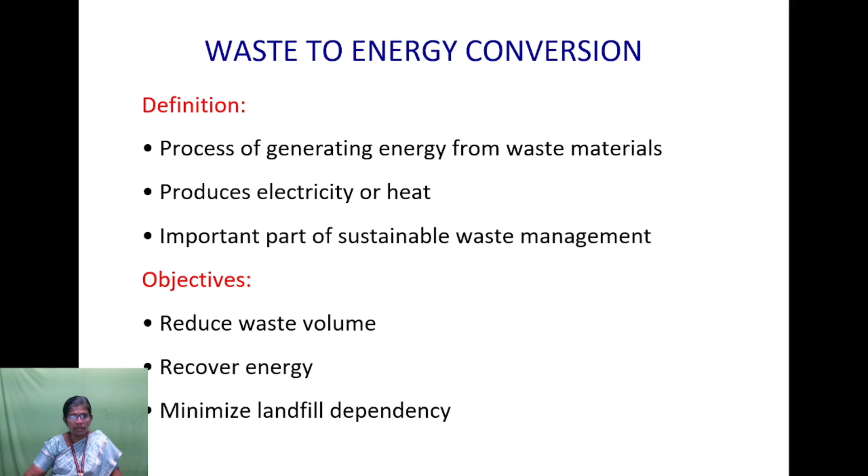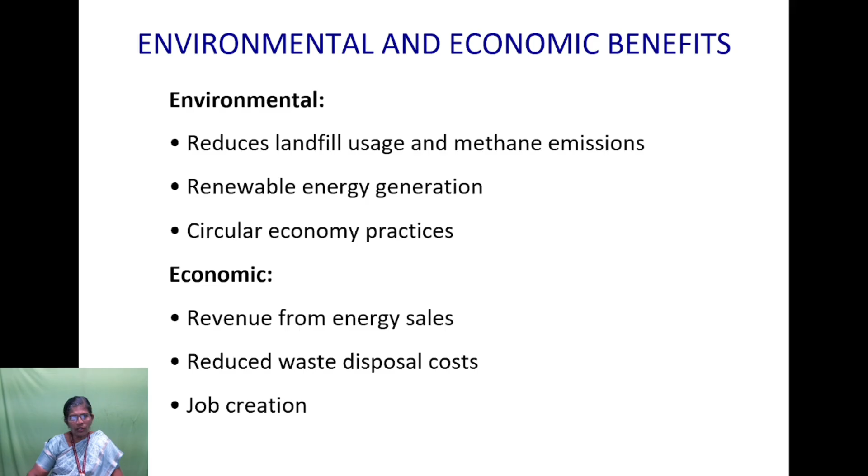Challenges in waste to energy conversion include technical challenges like high initial investment and need for waste segregation, and environmental challenges like emissions of dioxins and furans and toxic ash disposal. There are also social and policy challenges, including public resistance and lack of regulatory frameworks.

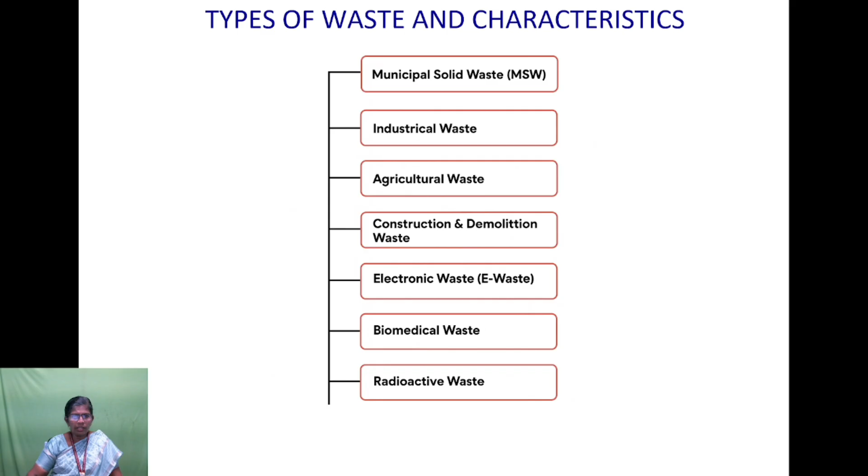Types of waste include municipal solid waste, industrial waste, agricultural waste, construction and demolition waste, electronic waste, biomedical waste, and radioactive waste. We will see these one by one.

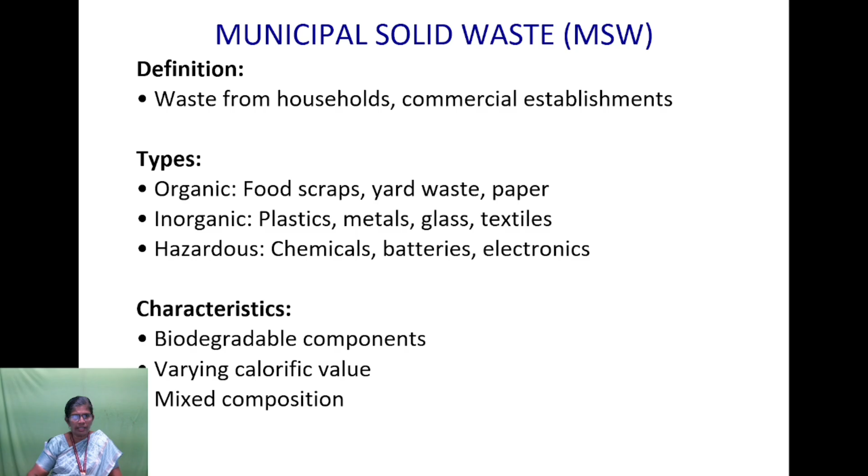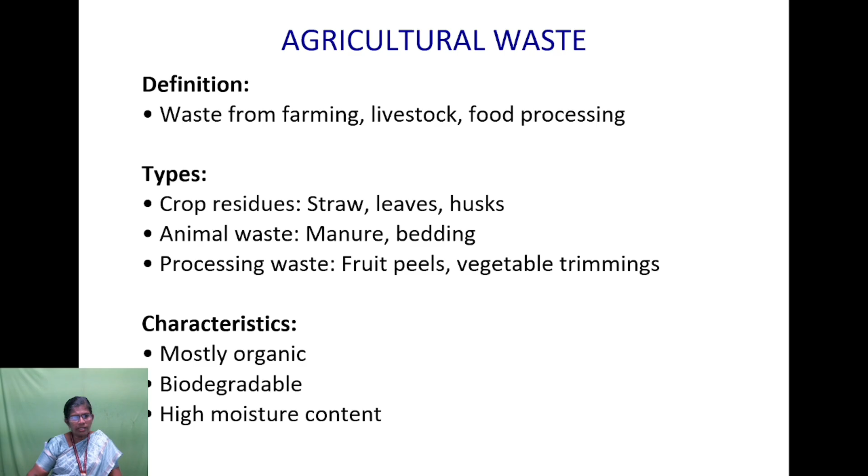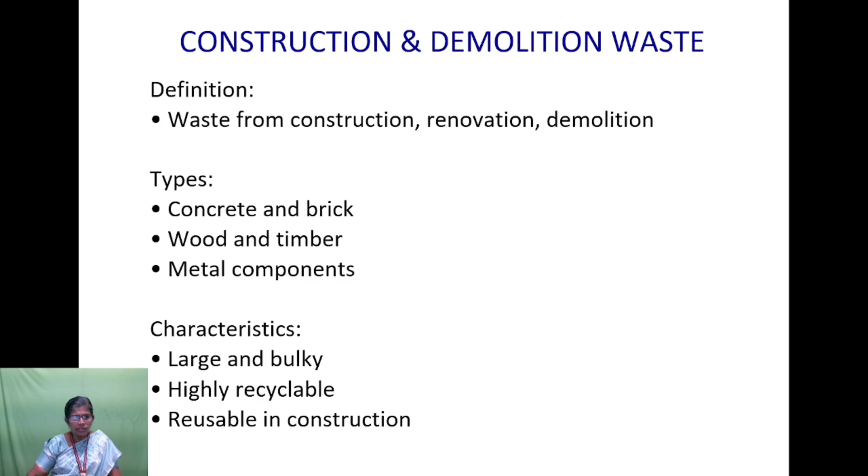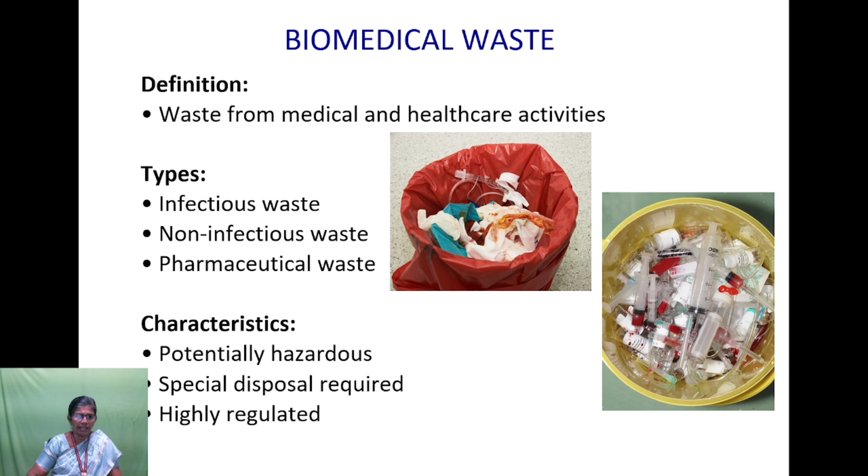Biomedical waste is from medical and healthcare activities. The types include infectious waste, non-infectious waste and pharmaceutical waste. The characteristics include that it is potentially hazardous and contaminative, needs special disposal methods, and has many regulations for disposal.

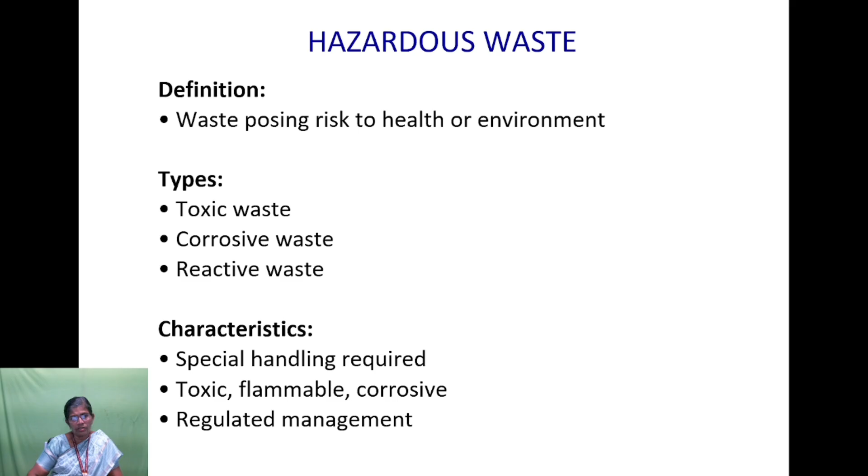Hazardous waste poses risk to health and environment. The types include toxic waste, corrosive waste, and reactive waste. It requires special handling, is toxic and flammable, and has regulations for its disposal.

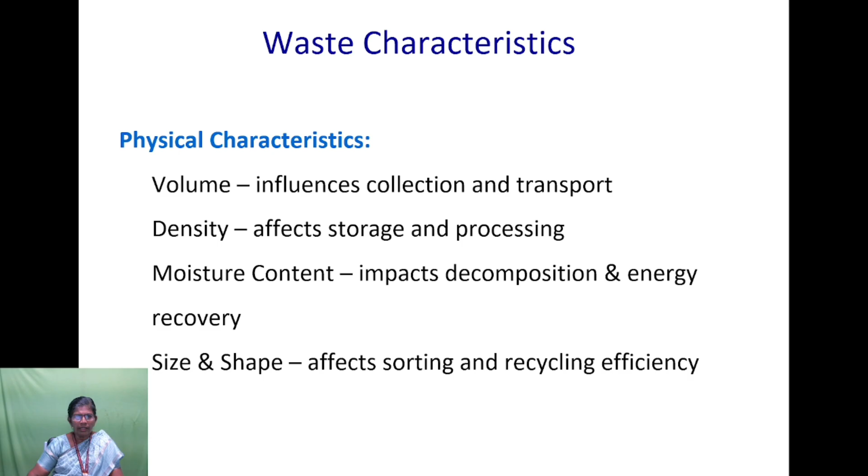Characteristics of waste include physical, chemical, and other properties. Physical characteristics include volume, density, moisture content, size and shape, which affect various processes, storage, and energy recovery and disposal.

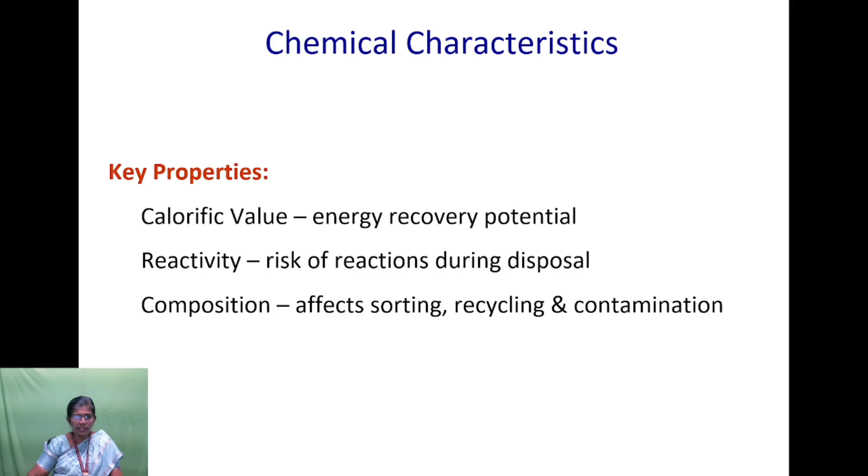Chemical characteristics include calorific value, which represents the energy recovery potential of the waste through thermal processes, reactivity which indicates risk of reactions during disposal, and composition, which may differ and affects sorting, recycling and contamination.

Biological characteristics include biodegradability and toxicity. Degradability includes biodegradable or non-biodegradable waste; organic wastes are biodegradable while plastics and metals are non-biodegradable. Toxicity is a critical concern because hazardous substances cause environmental and health risks. Common toxic materials include heavy metals like those in batteries and electronics, asbestos in construction debris, and hazardous chemicals in paints, solvents, cleaners, etc.

Environmental benefits of waste to energy conversion: it reduces landfill usage, reduces greenhouse gas emissions, and gives renewable energy. We can depend less on fossil fuels, and it gives resource recovery through sorting and segregation, leading to a circular economy and reducing environmental pollution.

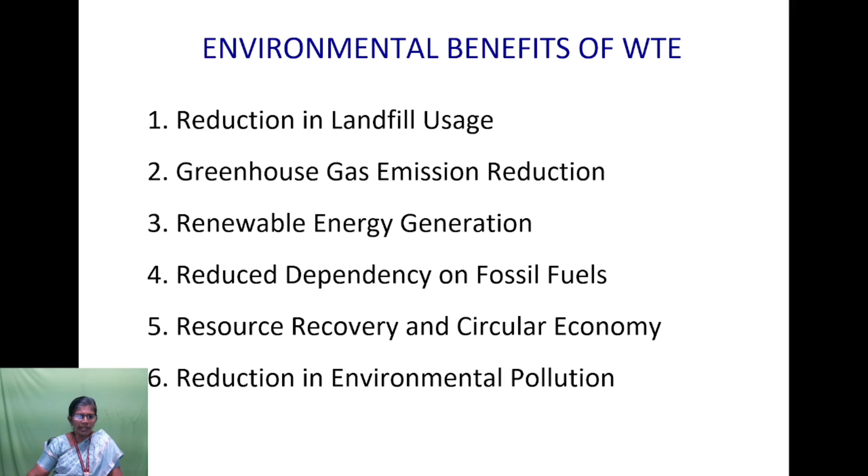Some environmental drawbacks of waste to energy conversion are air pollution and other emissions, and toxic ash as residue and byproduct. There is energy inefficiency, as it requires much energy, and water consumption is high. Health risk is also carried out through emissions.

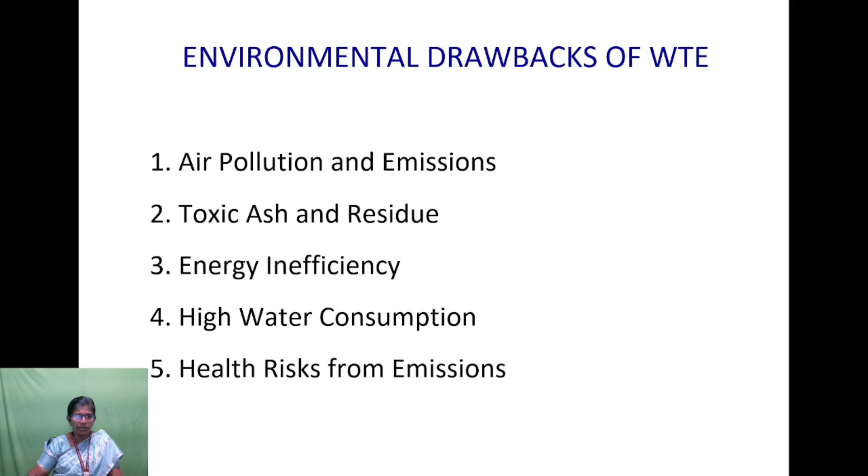Economic benefits of waste to energy: it gives revenue from energy generation and reduces landfill costs. It creates jobs and cost savings from energy recovery, and leads us to be independent from energy imports.

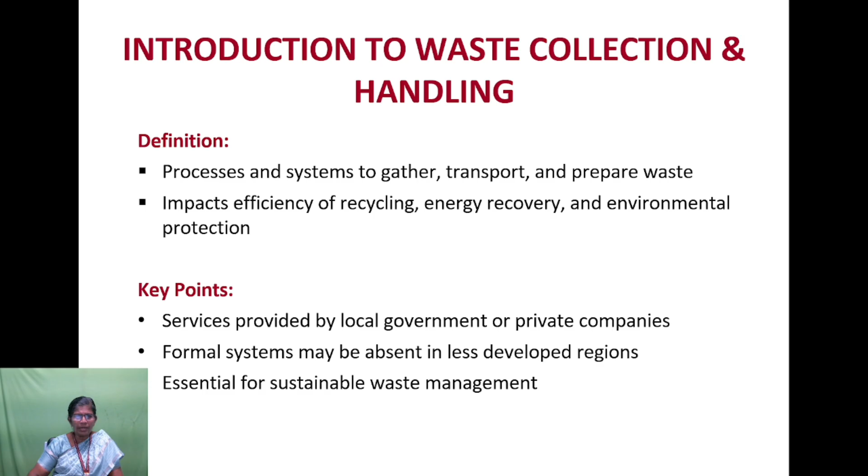The waste collection and handling - introduction. It is a process and system to gather, transport and prepare waste for further processes, and it impacts the efficiency of recycling, energy recovery and environmental protection. Key points include it being done as services by local government and/or private companies. Formal systems may be absent in less developed regions, but it is essential for sustainable waste management.

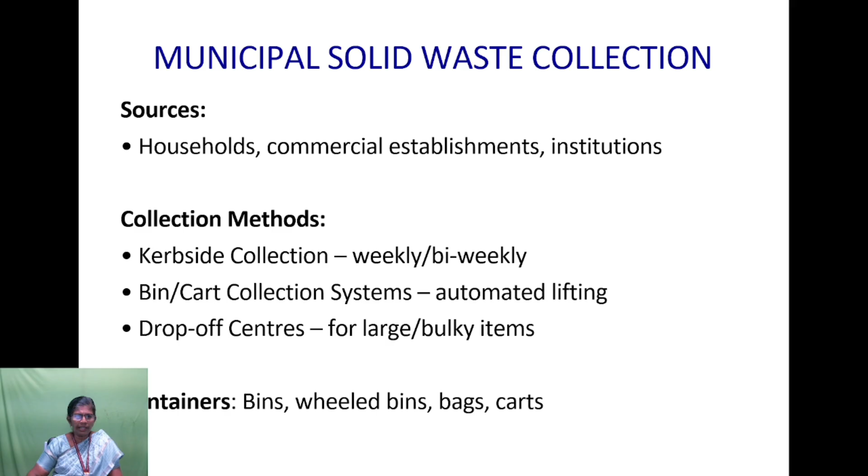Industrial waste collection: sources are from manufacturing and production processes from industries. Collection methods include on-site collection through drum skips, roll-off containers, and waste segregation, as well as bulk collection in compactor trucks or roll-off bins. Features include separate handling, and source segregation is very important.

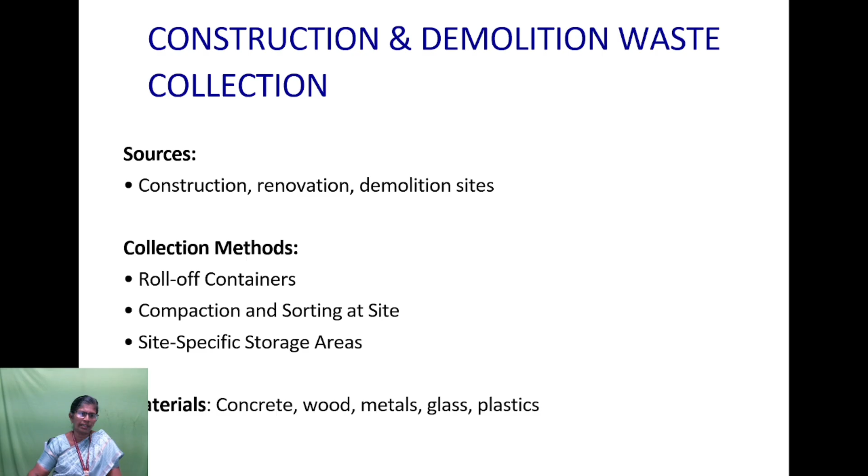Demolition waste. Hazardous waste collection: hazardous waste includes chemicals, solvents, batteries, medical waste, etc. Collection methods include specialized leak-proof containers and drums, with scheduled collection based on volume and type, which determines the frequency of collection.

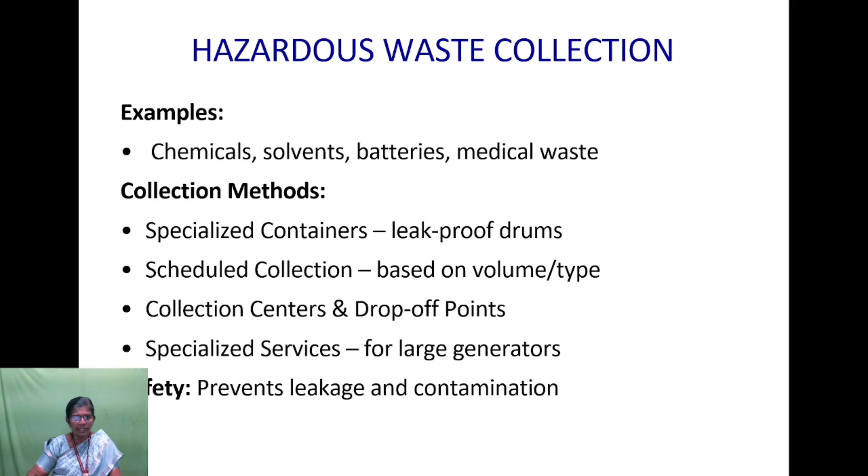Organic waste collection: organic wastes are produced in the form of food scraps, garden trimmings and agricultural waste. Collection methods include source-separated collection in dedicated bins, green waste bins for composting and digestion, and commercial organic collection from restaurants and stores. The uses are composting and anaerobic digestion.

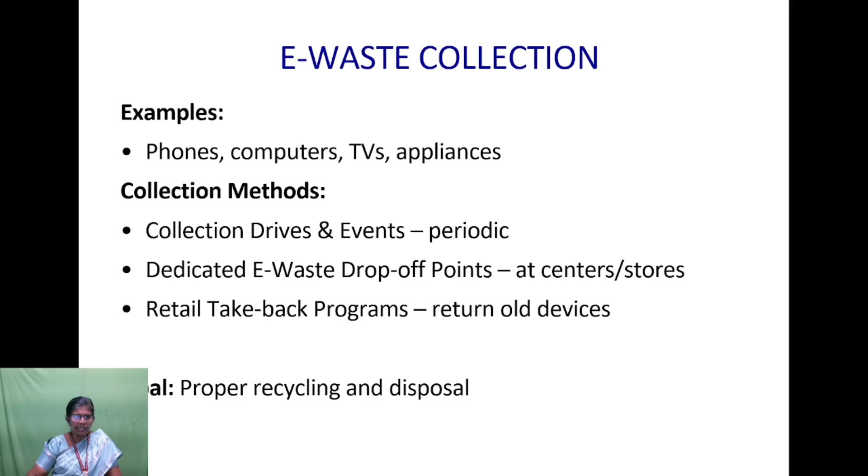E-waste collection: e-waste like phones and computers. Collection methods include periodic collection drives and events, drop-off points for e-waste at centers, and retail take-back programs where we can return old devices. This is a method of e-waste collection, and the goal is proper recycling and disposal.

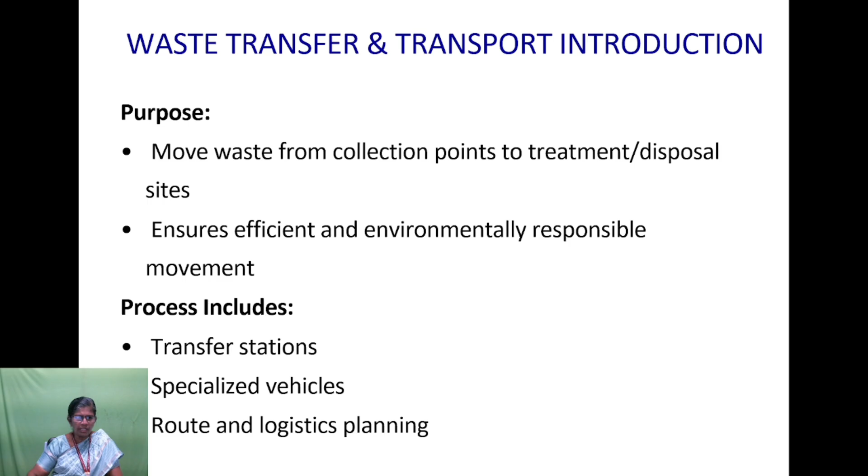Waste transfer and transport - introduction. The waste collected from various points should be transported to a treatment plant or disposal site. This ensures efficient and environmentally responsible movement. The process includes transfer stations, specialized vehicles, and route and logistics planning.

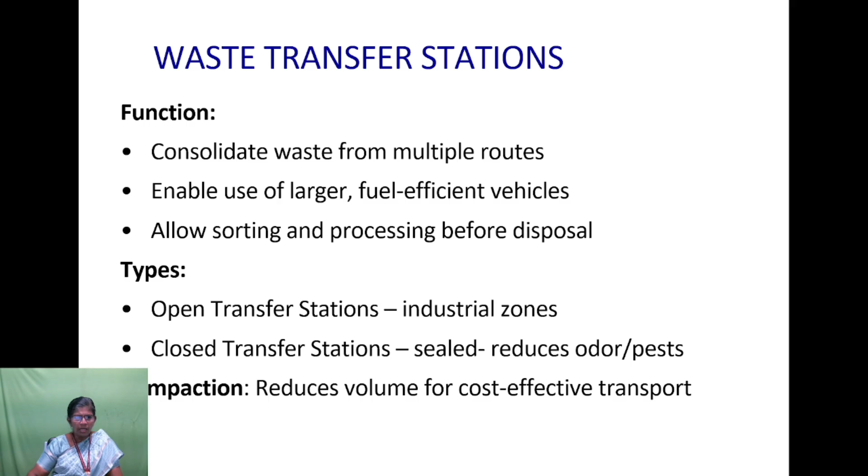Types of transfer stations are open and closed transfer stations. Compaction may reduce volume for cost-effective transport. Waste transport vehicles include garbage trucks, roll-off trucks, compaction trucks to reduce volume, tankers and specialized vehicles for hazardous liquid waste, and bulk transport vehicles for large quantities. Selection is based on waste type, volume and distance to be traveled.

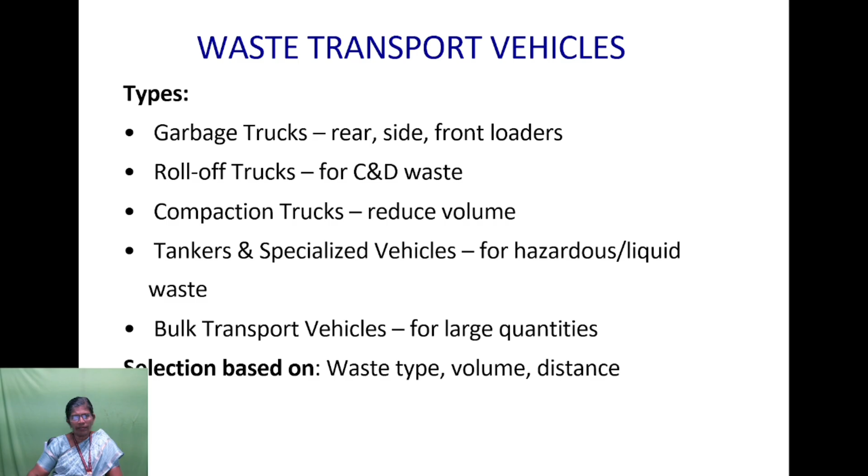Optimizing waste transfer and transport: strategies include route optimization and scheduling using software, technologies like GPS and automated systems, and sustainable transport through electric vehicles and alternative fuels. Collaborative approaches include public-private partnerships and municipal-industrial integration.

The benefits include lower cost, reduced emissions and improved efficiency. Environmental considerations in transport include air pollution, greenhouse gas emissions, noise and odor. Mitigation measures are low emission vehicles, proper sealing of vehicles, and optimized routes and loads. The goal is to minimize the environmental footprint of carbon.

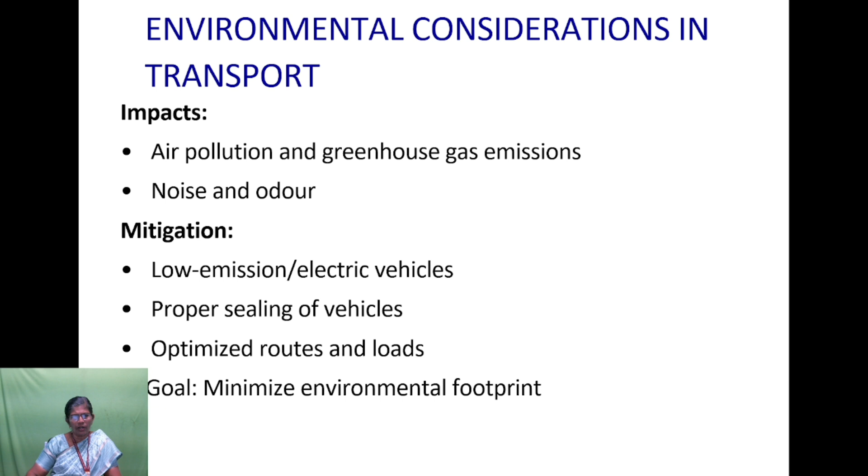Challenges in waste collection: it needs infrastructure, and may contaminate the environment, reducing efficiency. Public awareness and participation is very important. Climate and weather conditions also affect waste collection, causing delays, and it needs education, investment and new technology.

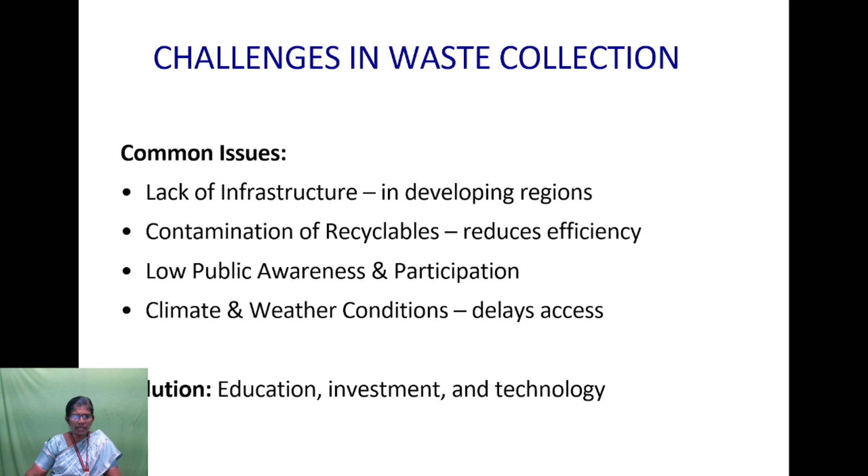Waste sorting is separating the waste materials at source or facility. Its importance is to improve recycling efficiency, reduce landfill waste, and conserve energy, providing economic and environmental benefits.

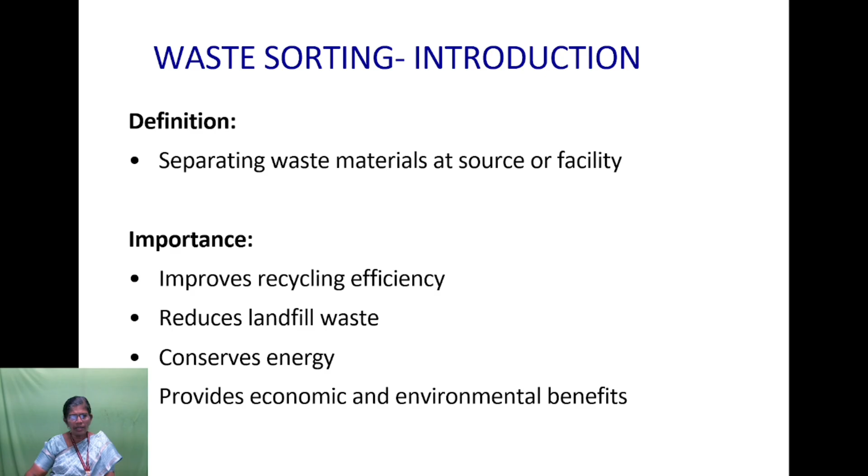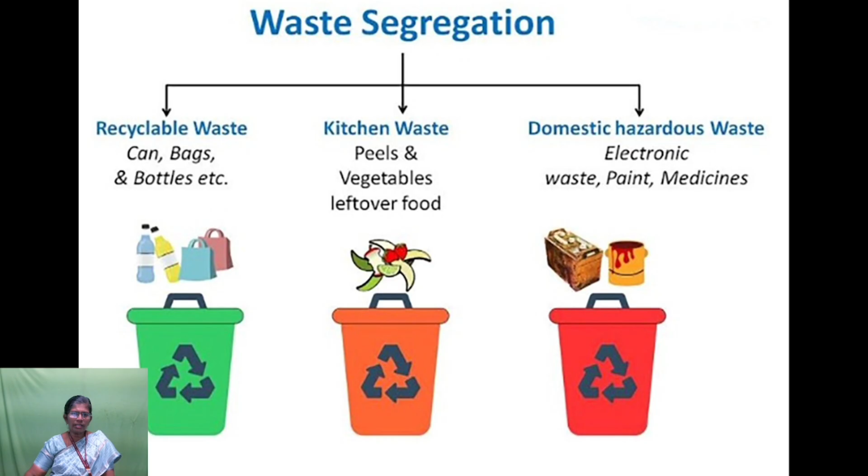Waste segregation involves types of bins: recyclable waste, kitchen waste, domestic hazardous waste, which we collect in different bins. Types of waste to sort include recyclable materials, organic waste, hazardous waste, and general waste.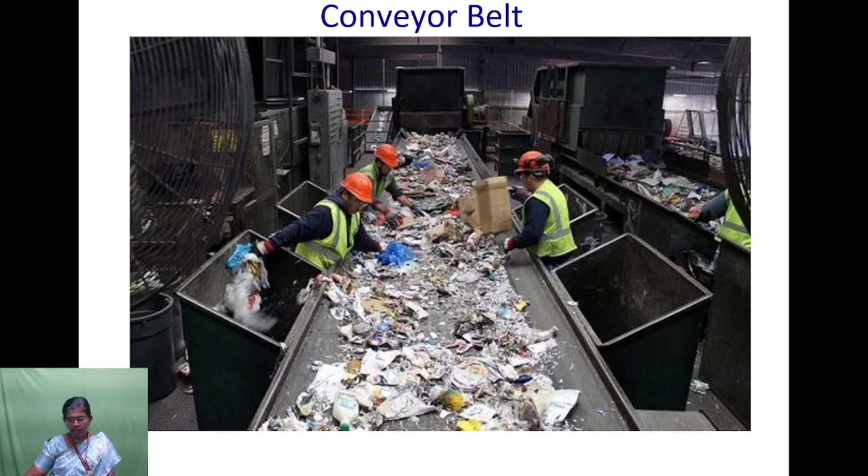This picture shows the manual sorting of various materials from solid waste. This is one type of sorting using a conveyor belt. The waste is transferred through the conveyor belt, and people standing on both sides of the belt collect the different materials and place them in different bins.

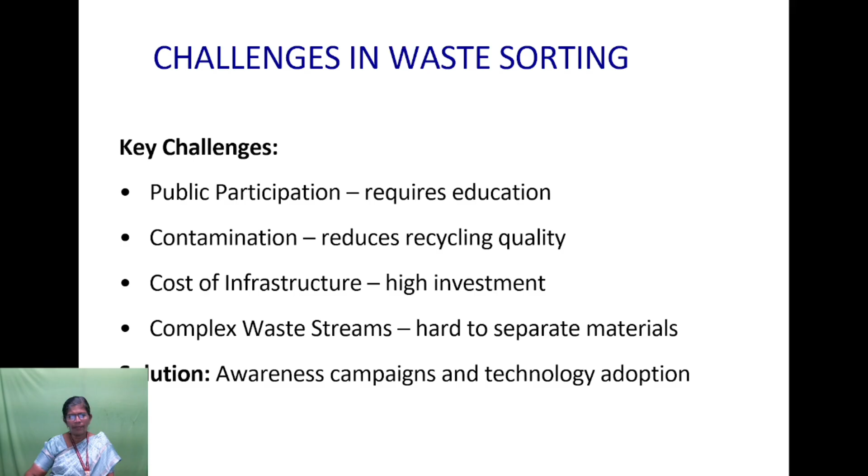Challenges in waste sorting include needing public participation, which requires education. At every step there is contamination, which reduces recycling quality, and the cost of infrastructure is very high. Complex waste streams are very difficult to separate. So awareness campaigns and technology adoption are much needed.

The benefits of waste segregation: environmentally, it reduces landfill use and contamination. Economically, it generates value from recyclables and reduces management cost. Socially, it promotes awareness and responsibility, and supports the circular economy.

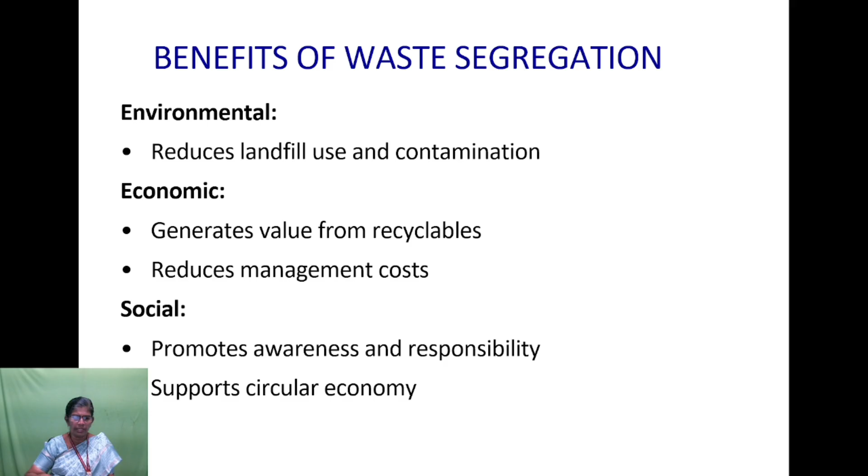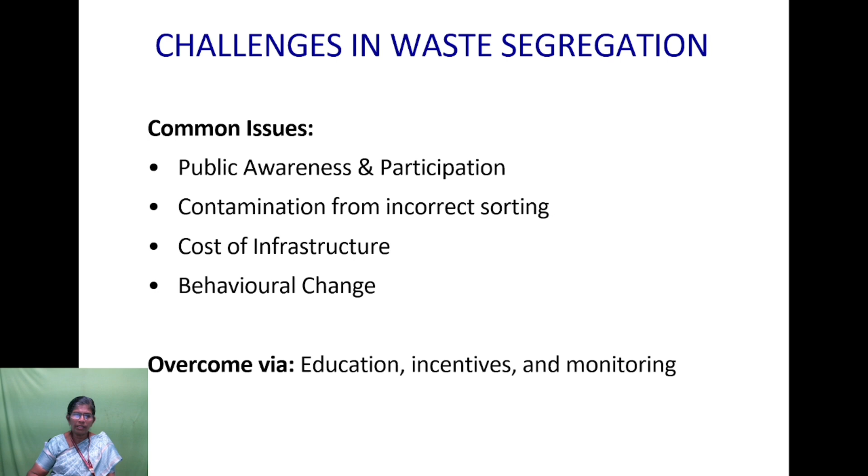Challenges in waste segregation include public awareness and participation, contamination from incorrect sorting, cost of infrastructure, and behavioral change. We can overcome these through education, incentives and monitoring.

Pre-processing of waste is done before disposal or energy recovery. Its purpose is to prepare the waste for energy recovery, improve quality, efficiency and safety, maximize energy recovery, reduce contaminants, and enhance the consistency of the feedstock and increase material value.

The stages include sorting, shredding, drying, pelletizing, and biological and chemical treatment. Pre-processing techniques: sorting and segregation are done by manual and mechanical methods. Shredding and size reduction is done using hammer mills and turbine shredders.

Drying and moisture reduction is done using mechanical, solar and rotary dryers. Biological and chemical treatment includes anaerobic digestion, hydrolysis, solvent extraction, etc. Pelletizing and briquetting is done for biomass and uniform fuel production.

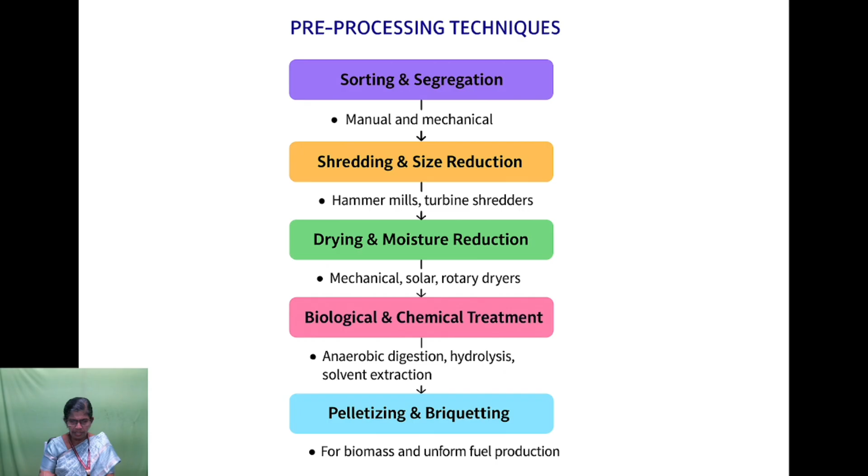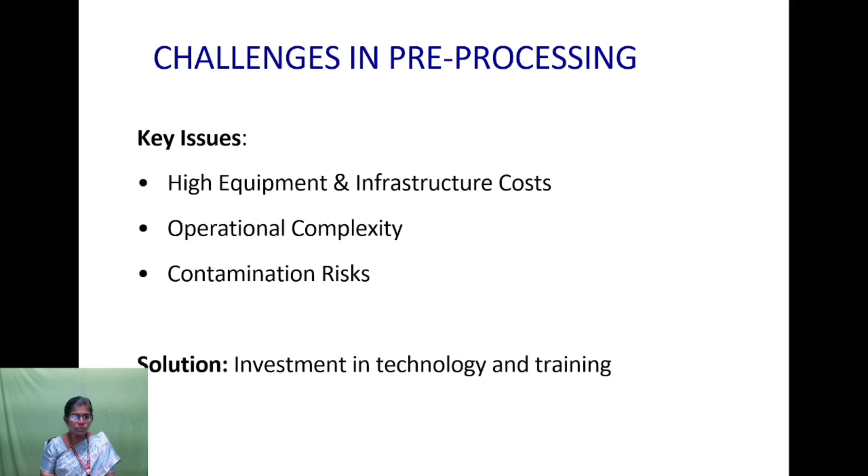Challenges in pre-processing include high equipment and infrastructure cost, operational complexity, and contamination. The solution is investing in technology and training. Waste to energy technologies convert waste material using methods like thermochemical, biochemical and chemical methods.

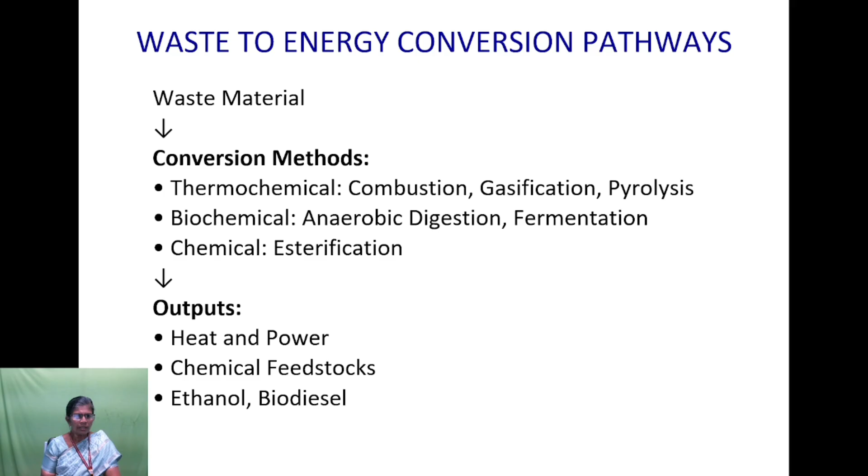Thermochemical methods include combustion, gasification, and pyrolysis. Biochemical methods include anaerobic digestion and fermentation. Chemical methods include esterification. Outputs are heat, power, chemical feedstock, ethanol, and biodiesel.

Thermal conversion technologies include incineration, which is full oxidation combustion at a temperature of 750 to 1100 degrees. The byproducts include heat energy, bottom ash, carbon dioxide, water, oxygen, nitrogen, and gaseous pollutants.

Pyrolysis is carried out in the absence of oxygen at a temperature of 300 to 800 degrees C. Byproducts are char, ash, bio-oil, fuel gas, and also methane, carbon dioxide, carbon monoxide, hydrogen, etc.

Gasification involves controlled oxygen content at a temperature of 550 to 1000 degrees C. The byproduct is syngas, which is a mixture of methane, hydrogen, carbon dioxide, CO, and inert gases, and also tar and hydrocarbons.

Emerging waste to energy technologies. New technologies include plasma gasification, which is carried out at high temperature. Plasma is produced, and the byproduct is syngas.

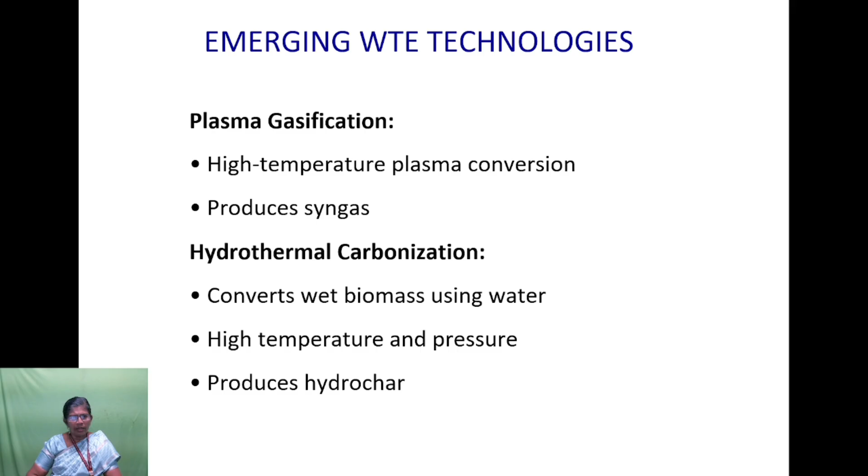Hydrothermal carbonization is conversion of wet biomass using water. High temperature and pressure are involved. It produces hydrochar.

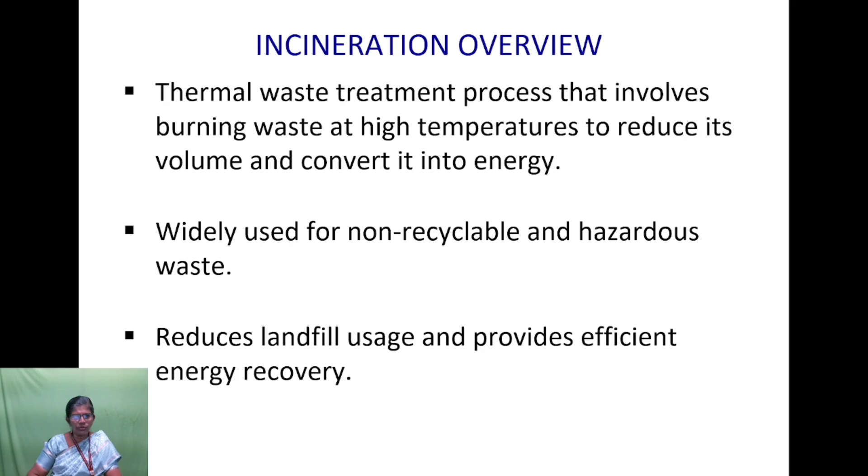Overview of incineration. It is a thermal waste treatment process that involves burning waste at high temperature to reduce the volume and convert it into heat energy. It is widely used for non-recyclable and hazardous waste, reduces landfill usage, and provides efficient energy recovery.

The types of incinerator systems include mass burn incineration, which is feeding without pre-treatment. It is suitable for mixed municipal solid waste.

Fluidized bed incineration uses a bed of hot sand-like particles. It is effective for high moisture waste, which contains high moisture content.

Rotary kiln incineration is a rotating cylindrical drum. It is used especially for hazardous and medical waste.

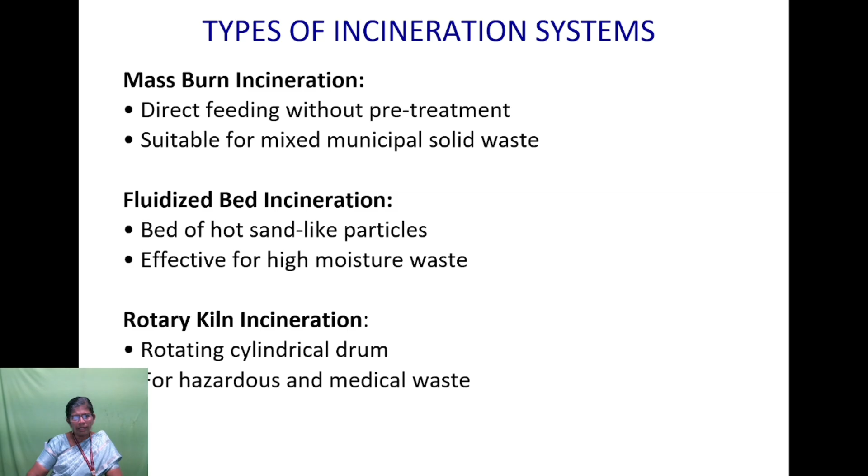Environmental aspects of incineration: the benefits are it reduces volume by 90%, provides energy recovery, reduces landfill methane emissions, and allows safe hazardous waste disposal.

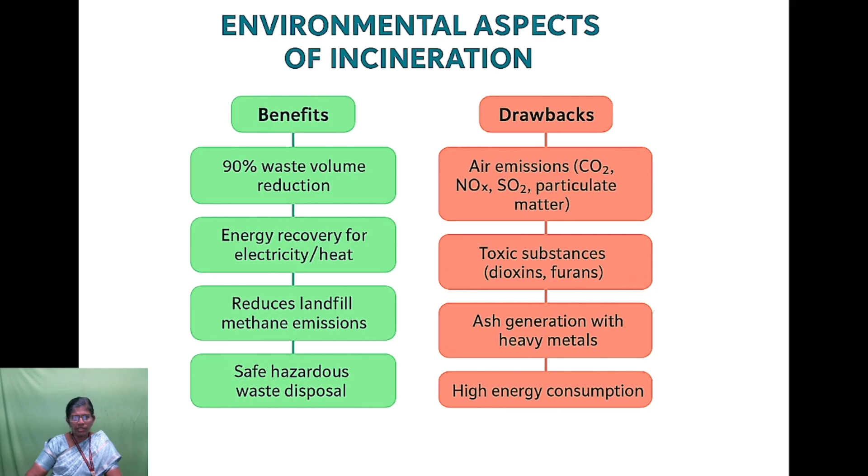Drawbacks include air emissions in the form of particulate matter, nitrogen oxides, sulfur dioxide, carbon dioxide, and toxic substances like dioxins and furans. There's also ash generation, which is difficult for further disposal since it contains heavy metals, and also high energy consumption.

Economic aspects of incineration: the benefits include renewable energy, revenue from the energy produced, landfill cost savings, and extended landfill lifespan, because reduced landfill usage increases its lifespan.

The drawbacks include high capital investment, operating cost, and waste sorting and emission control expenses.

Gasification is the next thermochemical process, which converts carbonaceous materials into syngas, containing hydrogen, carbon monoxide, and methane. This occurs at high temperature in an oxygen-limited environment, and is cleaner and more efficient than traditional incineration.

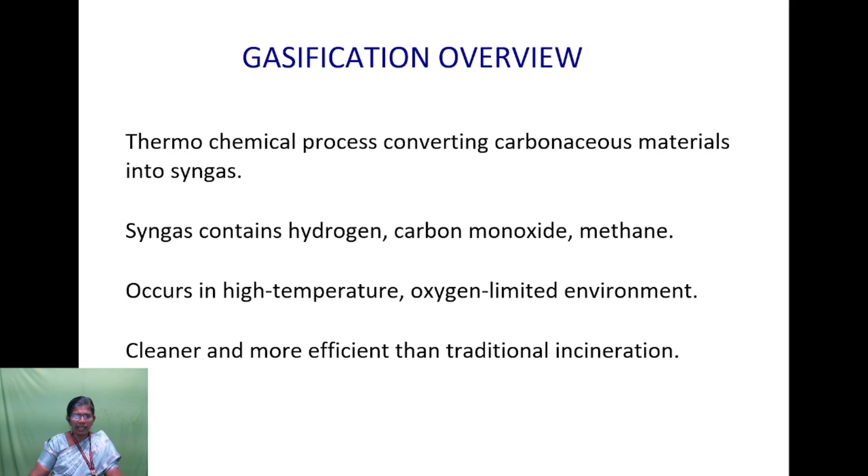This figure shows the gasification process. The biomass is fed from the left side, and steam is given from the bottom. Some quantity of oxygen is also sent to the reactor.

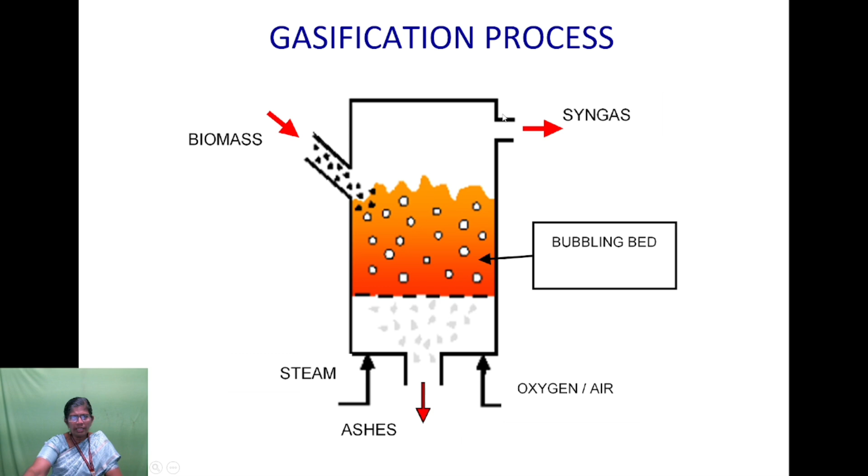The bubbling bed is there, and the syngas will be collected at the top and taken out.

The gasification technologies include fixed bed gasifiers, fluidized bed gasifiers, entrained flow gasifiers, and plasma gasification.

Environmental aspects of gasification: the benefits include reduced greenhouse gas emissions, 90% waste volume reduction, and cleaner emissions since it is carried out in a closed container. Fossil fuel dependence is also reduced. Drawbacks include some pollutant emissions, high energy consumption, and wastewater from gas cleaning.

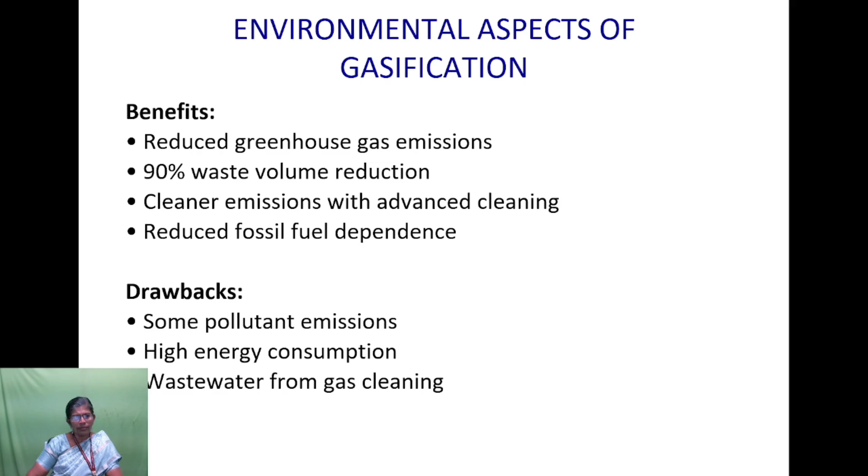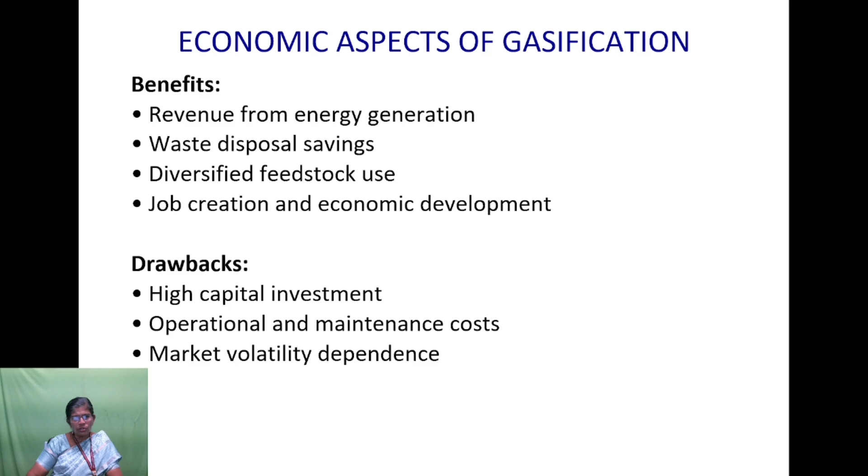Economic aspects of gasification: the benefits include revenue from energy generation, waste disposal savings, job creation, and diversified feedstock use. Drawbacks include high capital investment, operation and maintenance cost, and market volatility dependence.

Pyrolysis is a thermochemical process that decomposes organic materials at 300 to 900 degrees C in the absence of oxygen. This produces solid char, liquid bio-oil, and syngas. It is used especially for plastics, tires, biomass, and municipal solid waste. This prevents full combustion for varied energy recovery.

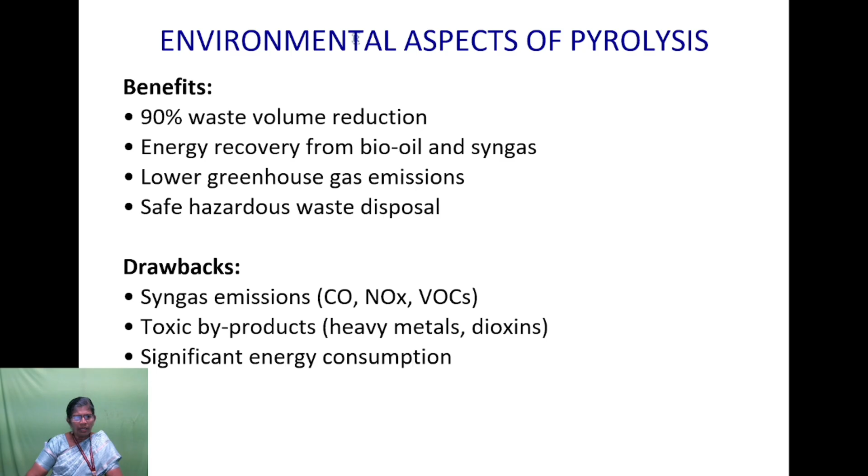Environmental aspects of pyrolysis: 90% waste is reduced, with energy recovery in the form of bio-oil and syngas, and reduced greenhouse gas emission, and it is safe for hazardous waste. Drawbacks include syngas emissions and toxic byproducts like heavy metals and dioxins, and it also consumes much energy.

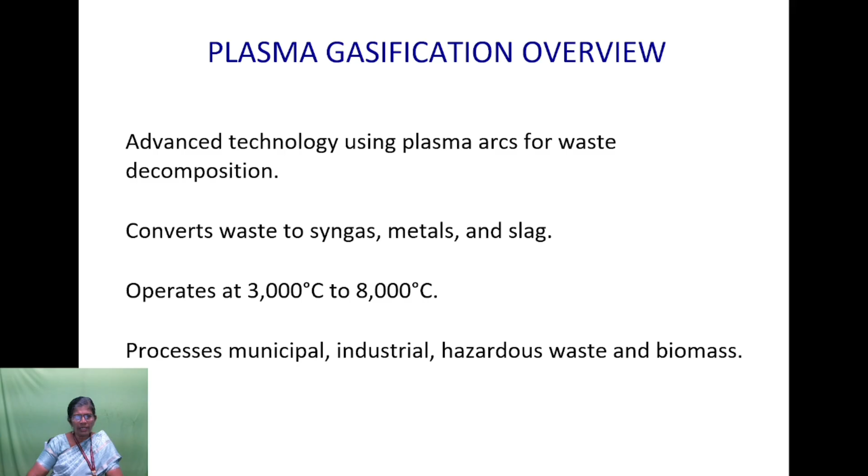Plasma gasification is an advanced technology using a plasma arc at a high temperature of about 3000 to 8000 degrees C. Here the conversion takes place into syngas, metals, and slag. The process is used for municipal, industrial, and hazardous waste and various biomass.

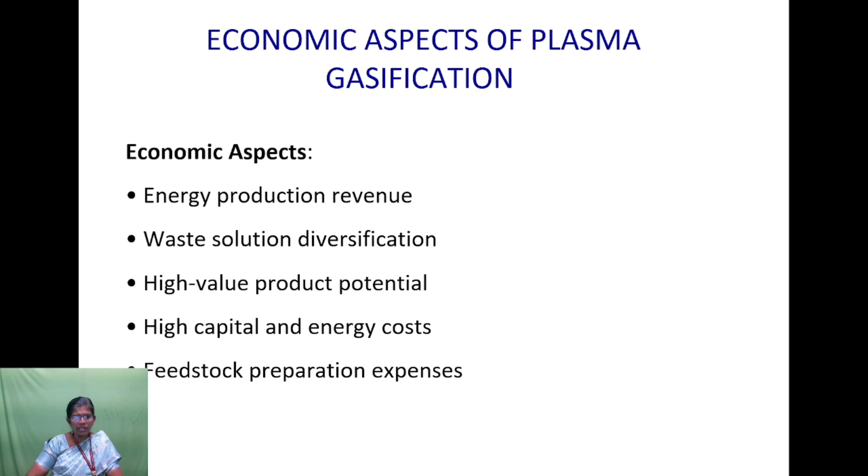Economic aspects of plasma gasification: energy production gives revenue through energy production and waste solution diversification. High value products are got as byproducts, and also high capital cost and high energy cost. Feedstock preparation is also expensive.

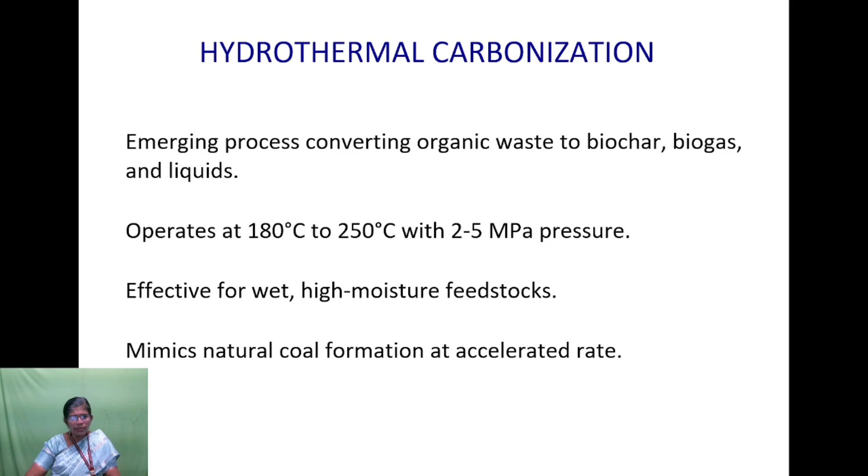Hydrothermal carbonization is a conversion of organic waste to biochar, biogas, and liquids. This operates at a lower temperature of 180 to 250 degrees C and high pressure of 2 to 5 megapascals, and it is effective for wet, high moisture feedstocks. This mimics natural coal formation at an accelerated rate.

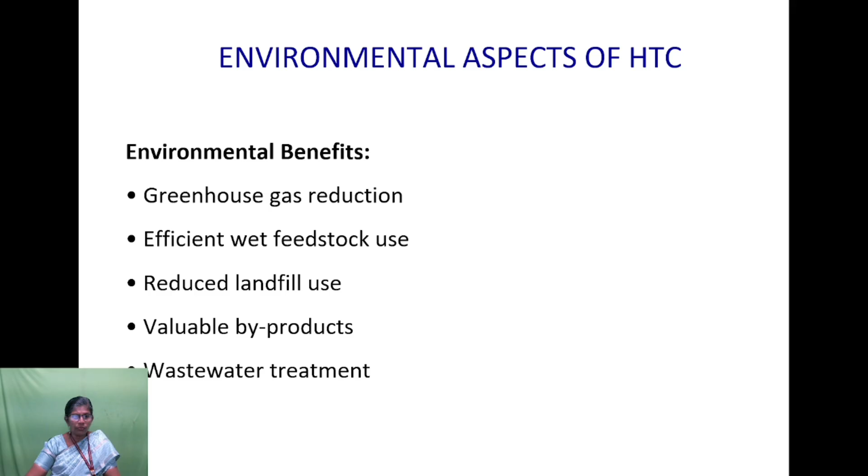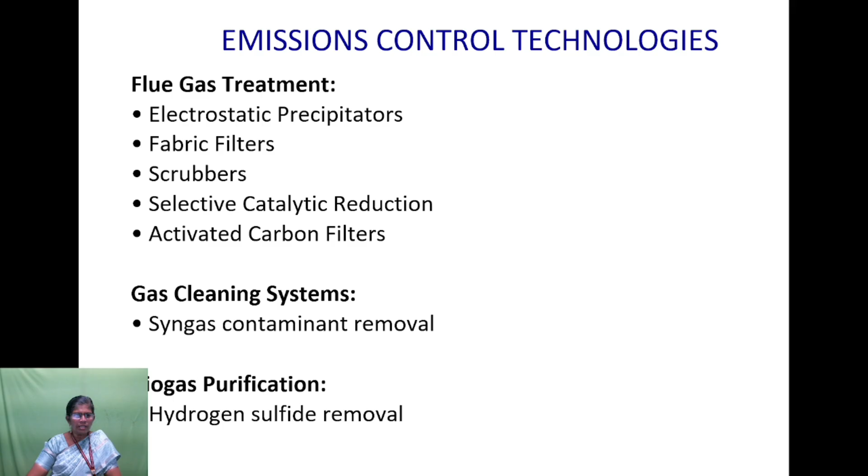Emissions control technologies include flue gas treatment using electrostatic precipitators, fabric filters, scrubbers, etc., and activated carbon filters for controlling emissions. Gas cleaning systems like syngas contaminant removal are also necessary, and biogas purification is done for hydrogen sulfide removal.

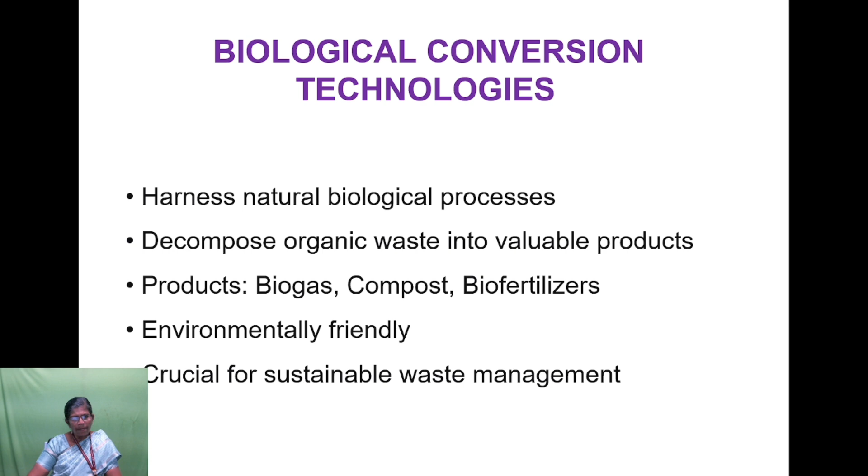Biological conversion technology is a natural process. It decomposes organic waste into valuable products like biogas, compost, and biofertilizers as byproducts. It is environmentally friendly and crucial for sustainable waste management.

Composting is a biological process which breaks down organic waste. It produces nutrient-rich compost, also called humus, using microorganisms in the presence of oxygen.

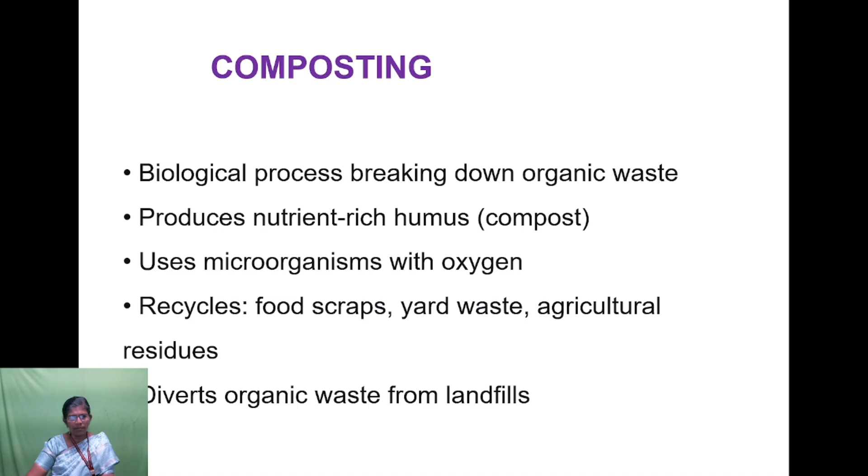Recyclables include food crops, food scraps, yard waste, and agricultural waste. These are taken to the composting process, which diverts organic waste from landfills.

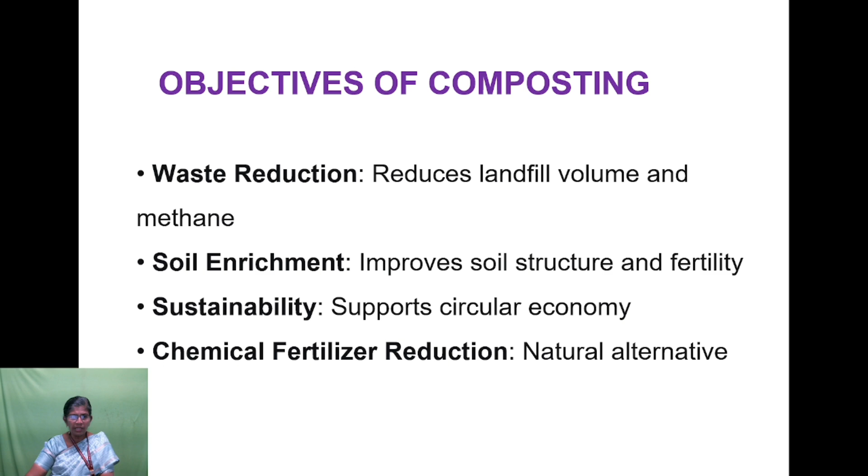Objectives of composting: it reduces waste going to the landfill and reduces methane emission. It enriches the soil and improves soil fertility. It is a sustainable process that improves circular economy, and it can replace chemical fertilizer.

Types of composting include aerobic composting and anaerobic composting. Aerobic composting is with oxygen, and anaerobic composting is without supplying any oxygen. Aerobic composting takes place up to 3 to 6 months, while anaerobic composting takes 1 to 2 years.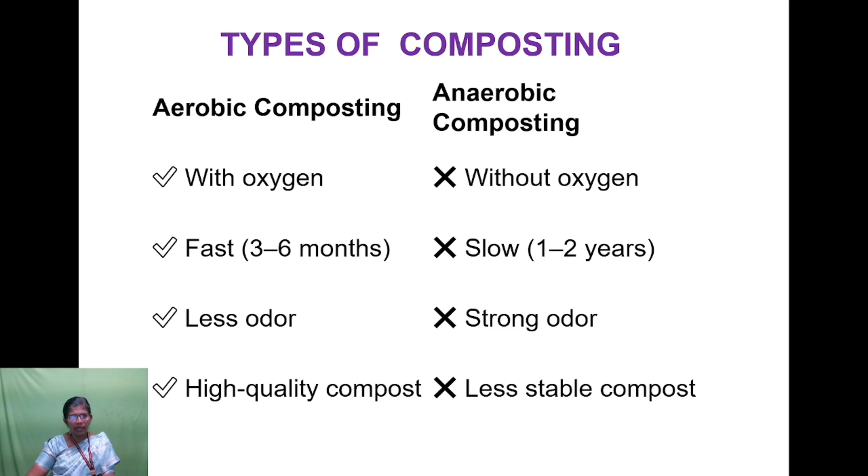Aerobic composting has less odor and gives high quality compost. Anaerobic composting has strong odor and gives less stable compost.

Another type includes vermicomposting and industrial composting. Vermicomposting uses earthworms and produces nutrient-dense compost; it is ideal for homes and gardens but requires high maintenance. Industrial composting is done in a large scale controlled process; high volume can be handled, but the cost is very high.

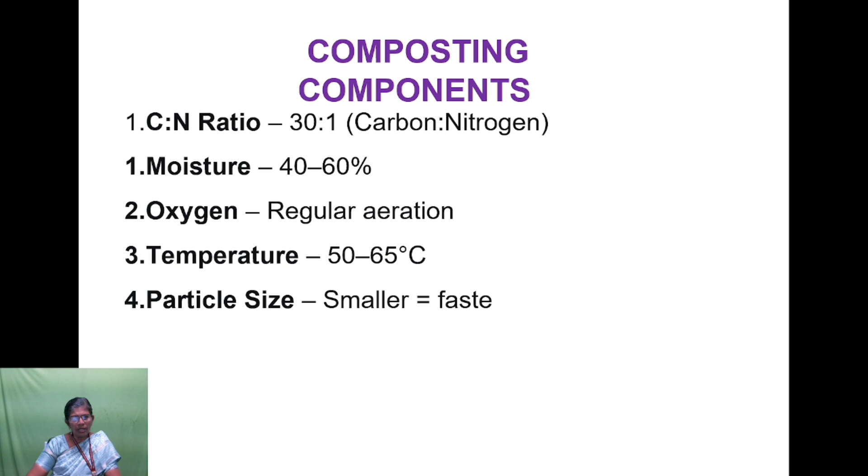Composting components: carbon nitrogen ratio should be 30:1, moisture 40 to 60%, oxygen with regular aeration needed, and temperature 50 to 65 degrees C. Particle size should be smaller; the smaller the particle size, the higher the speed of composting.

Composting processing stages: 20 to 40 degrees C is the mesophilic phase, the initial decomposition. 50 to 65 degrees is the thermophilic stage, during active decomposition where pathogens are killed. Then cooling and maturation is the third process, where temperature drops and it gets stabilized.

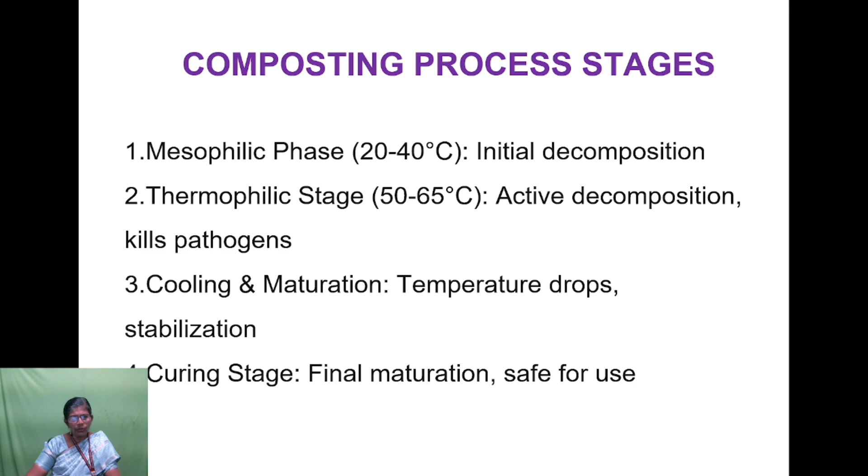The final stage is the curing stage, for final maturation, making it safe for use.

Challenges and benefits of composting. Benefits include waste reduction, improving soil, reducing greenhouse gas emissions, and saving cost. Challenges include odor issues, time consuming process, space needed for composting, and contamination risk.

Biomethanation is the other name for anaerobic digestion. It is especially used for degradation of organic matter. It produces biogas, a mixture of methane 50 to 70% and carbon dioxide 30 to 50%, converting waste to renewable energy.

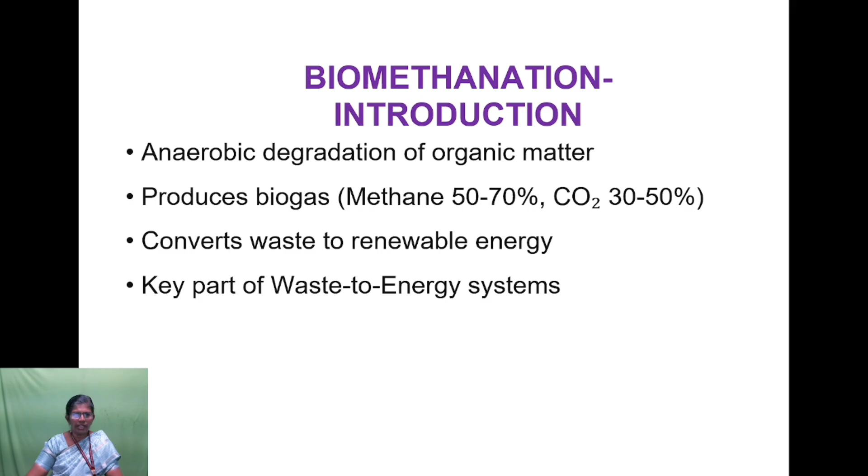This is the key part of the waste to energy system. Biomethanation objectives are energy recovery, waste management, nutrient recycling, as well as greenhouse gas reduction.

This picture shows the various steps involved in the biomethanation process. First step is hydrolysis, where complex organic matters like carbohydrates, proteins, and fats are reduced to soluble organic molecules such as sugars, amino acids, and fatty acids. This is called hydrolysis.

The next stage is acidogenesis, where the soluble organic molecules are converted to volatile fatty acids. So here it will be smaller organic molecules.

The third stage is acetogenesis, where volatile fatty acids are converted to acetic acid using acetogen microorganisms. In the fourth process, methanogenesis, the acetic acid is converted to methane and carbon dioxide.

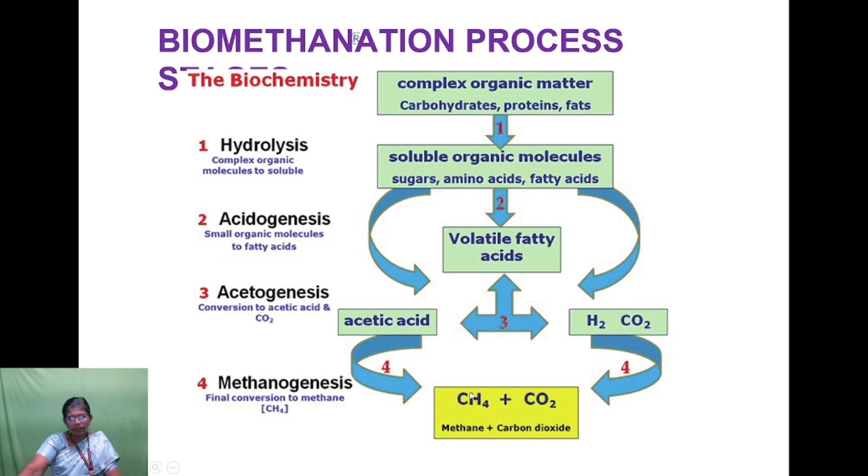Another process is co-digestion. Co-digestion is a type of anaerobic digestion where two or more organic wastes are combined together, for example agricultural waste plus sewage sludge.

The advantages of co-digestion are improved biogas production and better stability. Disadvantages are that it must be managed very carefully, and it can lead to contamination.

Factors affecting biomethanation: temperature. Mesophilic temperature is 20 to 40 degrees C. Thermophilic temperature is 45 to 60 degrees C. The optimal pH value is between 6.8 to 7.4, which is well suited for the anaerobic bacteria.

Organic loading rate is the amount of feed given over time. Other factors are retention time and carbon to nitrogen ratio, which should be 20:1 to 30:1.

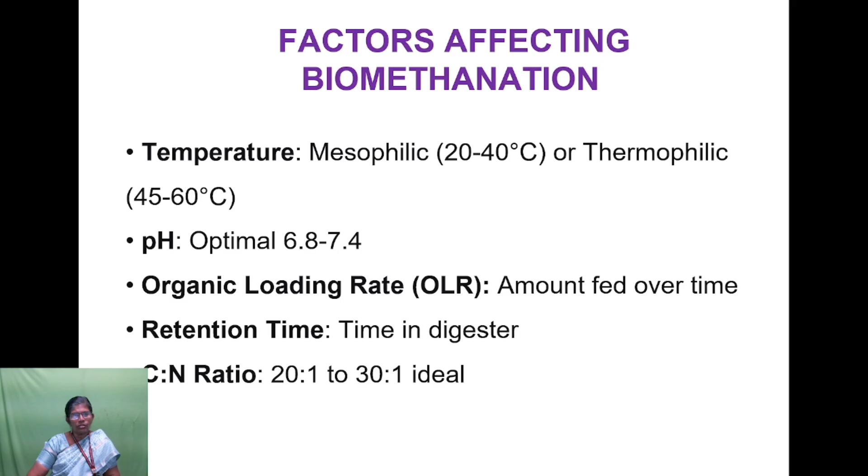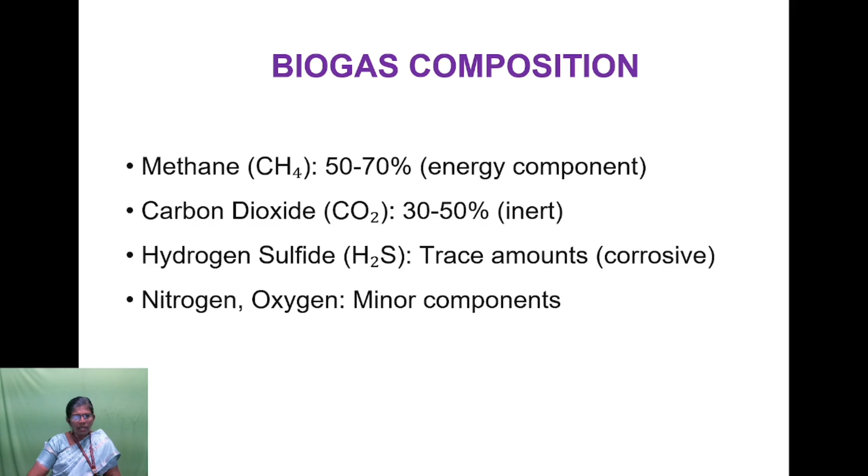Biogas composition is a mixture of methane 50 to 70%, carbon dioxide 30 to 50%, hydrogen sulfide in trace amounts, and nitrogen and oxygen also in minor quantity.

Biomethanation applications include electricity generation, heat production, compressed natural gas, waste treatment, and fertilizer, which is a byproduct from the anaerobic digestion.

Biomethanation benefits include sustainable waste management, renewable energy production, nutrient recycling, and reduction of greenhouse gas.

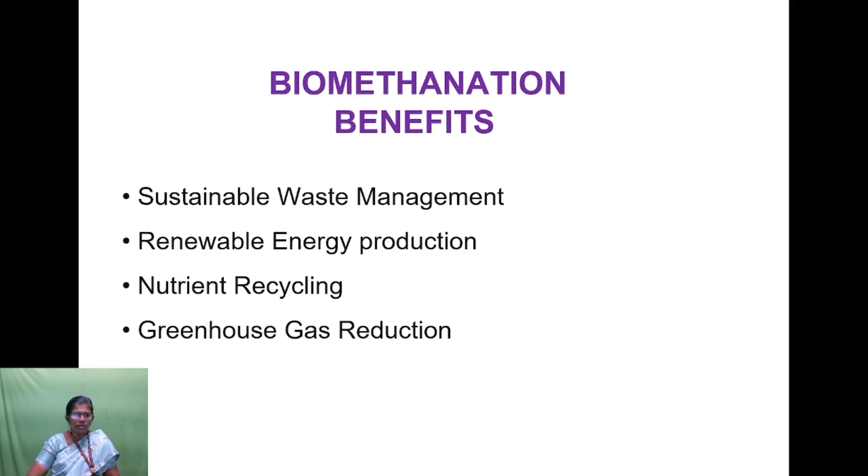Challenges: improvement is needed in the biomethanation processes. The process is difficult to control because the pH value, etc., should be controlled within limits. Otherwise, the process won't work properly. There are also many contamination risks and a high initial investment cost.

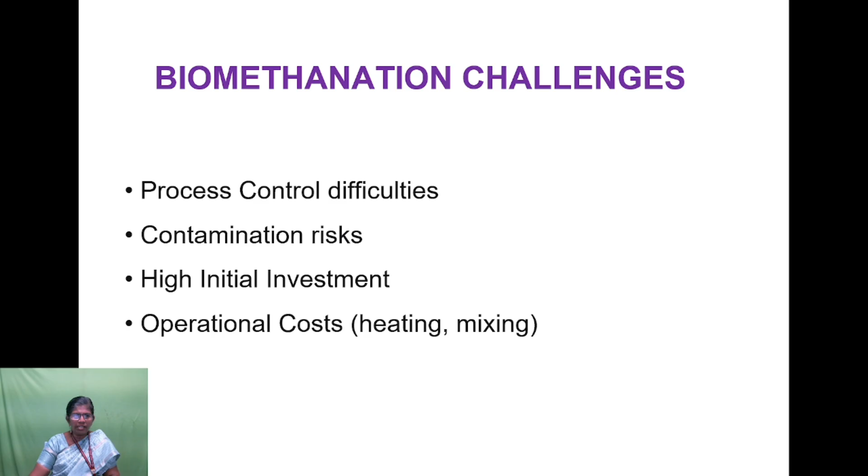The reactor cost is very high, requiring much space and many arrangements. Operation cost is also high.

Case study 1: Shenzhen waste-to-energy plant in China. Overview: it handles 5,000 tons a day with 100 megawatt capacity. The process adopted is incineration, power generation, and SCR and scrubbers. Key features include high capacity, community engagement, and sustainable development.

This is also a waste-to-energy plant, handling 1,000 tons a day, producing 24 megawatts of electricity. They use a gasification process producing syngas, from which electricity is generated. Key features are diversified waste, stringent emission control, and zero waste goals.

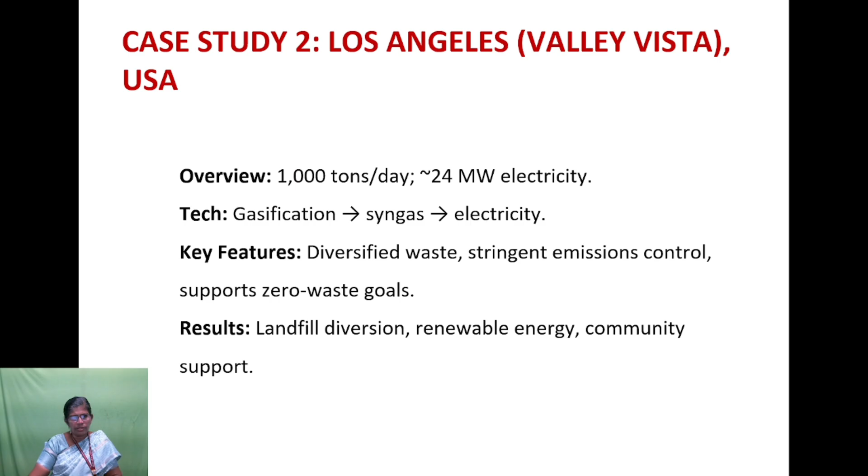Also Sakai waste treatment plant in Osaka, Japan, processes 1,000 tons per day with high efficiency. They follow incineration with combined heat and power.